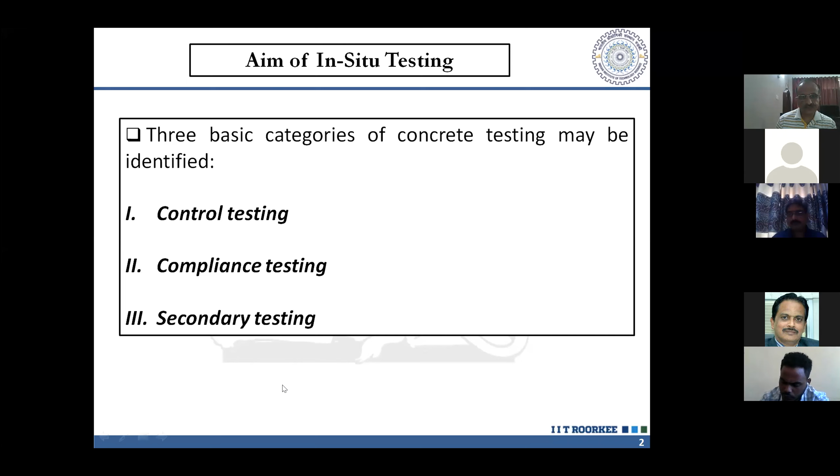If all these tests were planned beforehand, they form part of the second type of testing. If they were not planned beforehand, they are being carried out because something has gone wrong, there is some kind of suspicion, or any other kind of problem. If you are then doing testing on a newly built structure, it will of course be secondary testing, but the type of test will essentially be similar in nature.

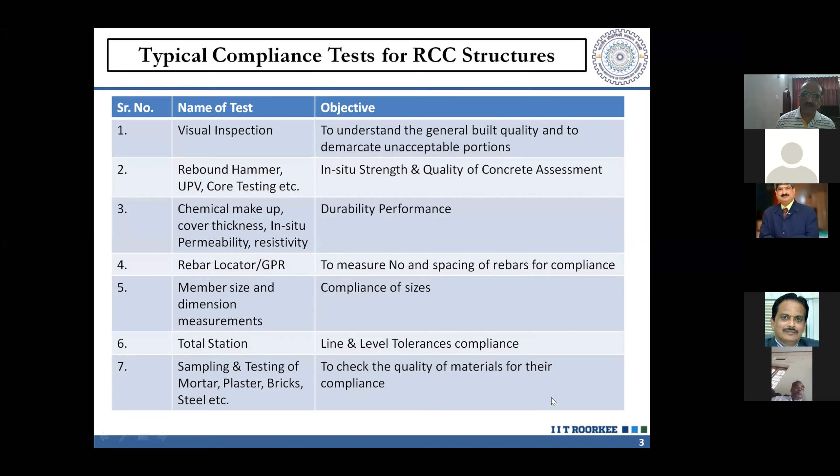If we do all these tests on a newly built structure and see that largely things are in place, then we can say that as far as construction quality - both with respect to material and workmanship - is concerned, that is fine, and everything is as per specification. If something is wrong somewhere, then corrective measures are to be taken.

Now, typical secondary testing program - compliance testing can also be secondary testing if it is not planned beforehand, as I've already explained. Secondary tests generally cover both unplanned tests on a newly built structure, and testing of old structures. Testing of old structures can be done for many needs, many reasons, which are coming in the next slide.

Different typical testing programs which form part of secondary testing are given in this table. As I said, compliance testing can be there. Second is in-situ strength assessment of existing or old structures. Very often we are required to compute the structural adequacy or structural capacity of different members and the structure as a whole.

For that, we have to find out in-situ strength of concrete - very, very important. So in old structures, that is required to be found. This is one type of secondary testing.

Now, durability testing of an existing structure - the aim is to know the cause and extent of deterioration, meaning to find out the cause of the problem if we figure out some kind of deterioration, and also to know the extent of the problem or quantify it, so that appropriate restoration and rehabilitation measures can be designed. The most common example is corrosion. For corrosion, we have to carry out a number of tests to find out the cause and extent of the corrosion, and then design the rehabilitation, repair, or restoration strategy accordingly.

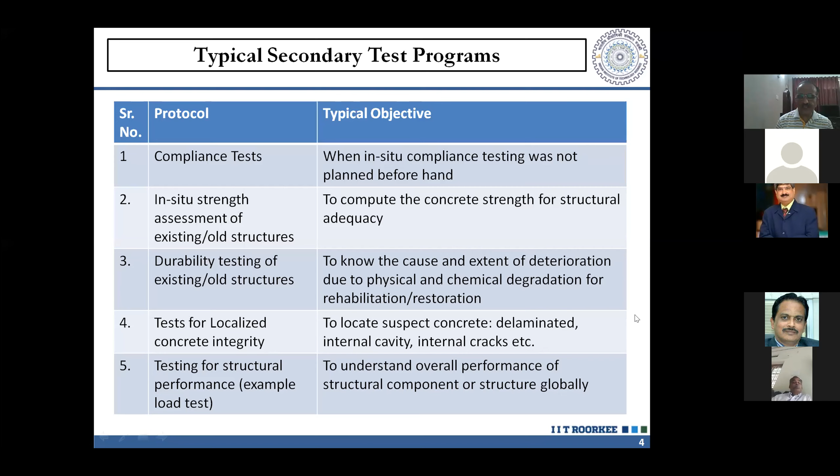So these are all different typical testing programs. There can be many more also which can be part of secondary testing. Now, as I said, there are different needs for doing all these secondary test programs.

Second is acceptability of a structure for purchase or insurance. If somebody wants to purchase a particular building or structure, he or she may say, I want to get it audited, I want to get its structural audit done. So that is also one form of secondary testing, because testing would be required there.

Assessment of structural integrity or safety following material deterioration. If after some years we see some kind of deterioration happening, or damage caused because of overloading or an accident like fire, blast, fatigue, or other such causes, then also we have to carry out assessment. So that is one example, or one type, of the need for secondary testing.

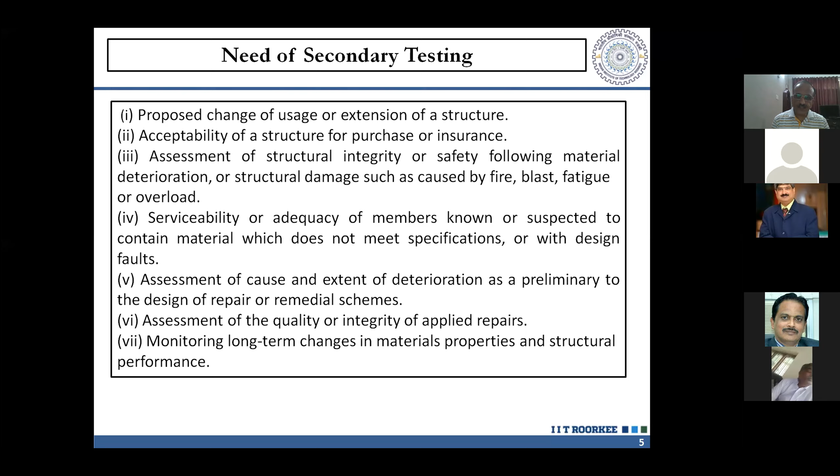Assessment of quality and integrity of applied repair. Yes, of course, we have not reached that extent, especially in India. Only in a few cases have I seen that once the repair or restoration is done, people assume everything is over—actually it is not. Many times repairs are not done properly, and then the quality of the repair itself needs to be checked. So that is also one form of secondary testing.

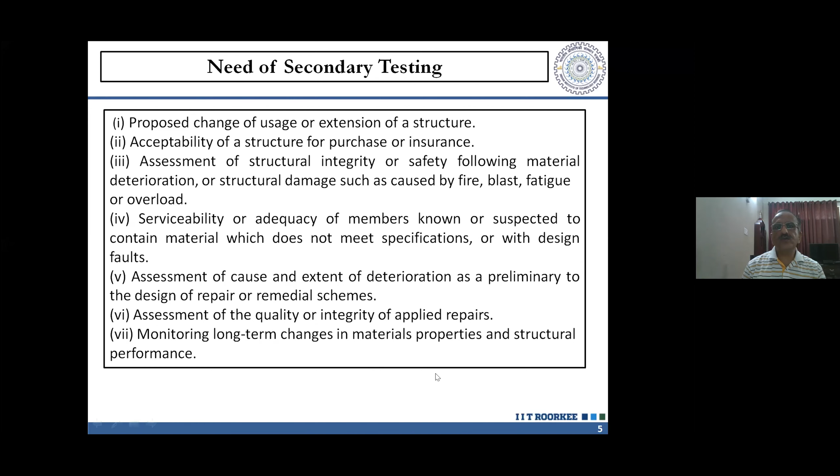Then, of course, monitoring of long-term changes may be required for some time, especially for academic reasons. So these are all the needs. Now, what is the sequence of testing?

Testing program planning—as I said, the aim of testing should be clear right in the beginning. Only then will we be able to plan our tests properly, interpret the results properly, and come out with meaningful conclusions—only if we have established the aims right in the beginning.

So the aim of testing is required, and you can take the cue from the previous slide—whether it is compliance testing or secondary testing, and if it is secondary testing, whether it is because adequacy of an old structure is required for some kind of expansion. That aim has to be clearly defined right in the beginning.

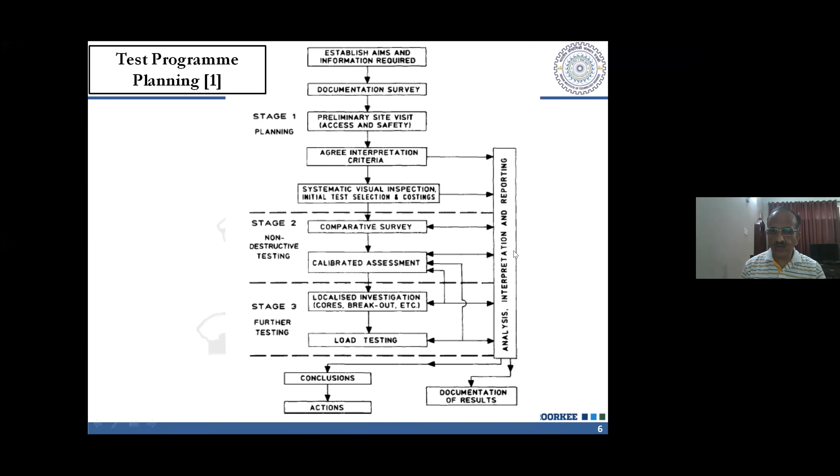So here, further testing essentially meant load testing. Load tests are full-scale tests. There are risks also, very, very difficult, and should be carried out only in unavoidable circumstances. So you just go here and make a conclusion. This is a broad flow chart of the whole testing program.

Now, test selection: if testing for concrete strength is required, it could be part of compliance testing, part of secondary testing, and further within secondary testing, it could be part of different types of testing programs also. If in situ assessment of strength is required, which is generally required in all testing programs, whether compliance or secondary, and further in secondary or compliance, any other type of testing, this is something which is always done.

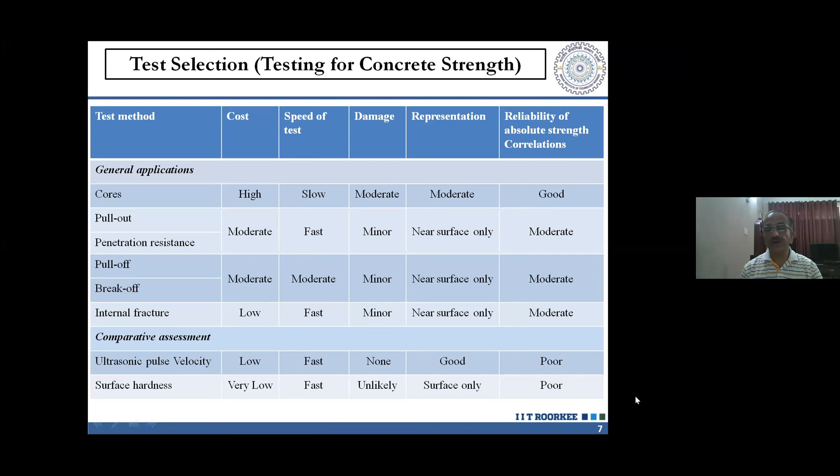UPV and rebound test, surface hardness tests - they are the most common ones. All other things are okay, but the reliability is poor. As I said, you can make them moderately reliable if you take into account and make corrections for all the influencing parameters.

Now, durability tests, which are also required for both types of testing programs. Some of them would be required as part of compliance testing, and remaining ones would be required as part of secondary testing. You can see this is a list - I'll not read it all, but you must be familiar with many of them.

Cover measurements are required in order to check compliance testing - checking compliance with design specifications, whether the proper cover thickness was given, so we can say whether enough durability will remain in future life. But if it's an old structure, cover can be checked to see whether the original cover was sufficient, because that will let you know if a problem has occurred. For example, if carbonation or corrosion has been seen, generally you will see it is at the location where cover was not proper. So cover measurement is required.

Carbonation depth is required in order to find the cause of the corrosion. If it is because of carbonation, chloride content is required to be found - there are different methods. Half cell potential and resistivity are required. These three tests are required to know the cause of the corrosion.

These two tests are required in order to check whether the corrosion is active right at the time of testing, and further in order to demarcate the corroding areas and non-corroding areas, so that you can carry out rate of corrosion tests on the corroding areas in order to find out the rate of corrosion.

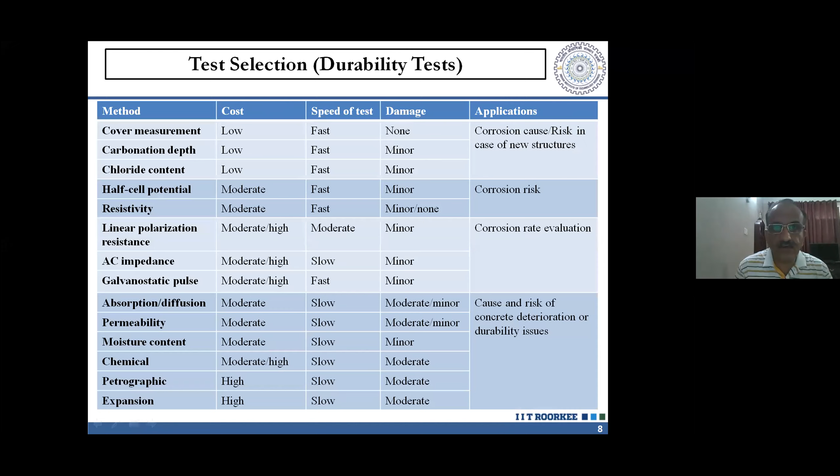Now the most important question which is always in our mind when we go to the site: we have established the aim of testing, and we have largely understood the sequence of tests, to what extent we are going—whether we are restricting ourselves only to visual inspection, or going to the stage of in situ testing, where we perform both comparative and calibrated assessment. Both will be done. So once decided, we go to the site, go to the building, and start the tests.

Tests have been selected. Now, how many tests? How many tests at one location should be carried out so that they represent one reliable observation point? And also, how many observations should be taken on one complete structure? That is the biggest question in our minds.

This table shows the number of tests only for the strength assessment test, but there are similar guidelines available in books and codes, some mentioned in this presentation. Their guidance is given even for other types of tests, like durability tests also. But since strength assessment is always the most common type of testing program, I have put the number of tests to be carried out at one location, which will form one observation.

For example, if you want to take one core observation at one location, then 3 standard cores should be taken—standard meaning 100 by 200 size cores. Small cores means when you are not using standard size, less than 4 inches, 3 inches, or 2 inches, because guidelines allow that if the aggregate size is something, the core diameter has to be more than 3 times the aggregate size. So for 20 mm aggregate, a 3-inch core would be okay, but that is not a standard core—that is a small core.

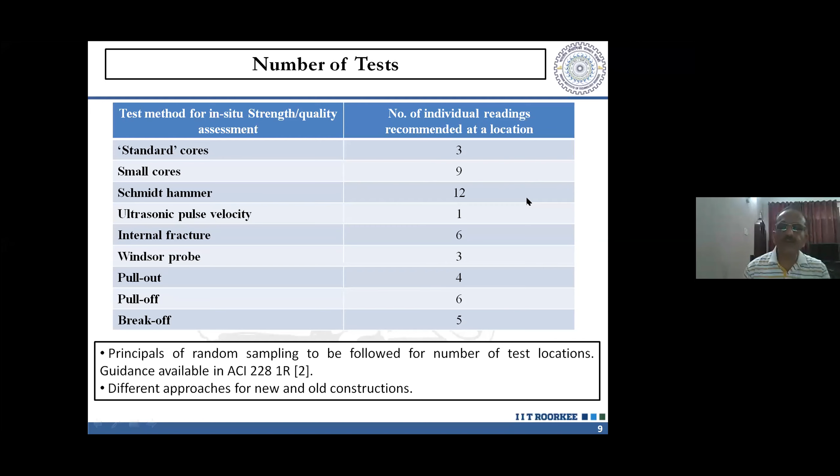There is some more guidance given in these slides, which will help you decide exactly where you should take the reading in a beam, column, slab, or wall after deciding the number of locations. When you do concreting of different kinds of elements, some are shown here. There is variability coming from supply of the concrete, variability from curing, variability from compaction and placement - so many sources. Variability of supply is something which does not follow any pattern.

Variability of compaction and curing in different elements largely follows a certain pattern that can be found out to some extent, but supply variability is always random and difficult to figure out precisely. Because of all these issues, concrete strength will always vary along the height.

This is the variation along the height shown here. If you try to show it with respect to the strength at the bottom of the member, you will see that in the beam and the wall, the variation is largely uniform from bottom to top. Top could be even 50 to 60, 70 percent, or sometimes very less, almost half of what you see at the bottom.

For columns and slabs, generally slabs are 6, 7, 8 inches thick. If slabs are very thick, which is rare, you have to treat them like a beam. In columns and slabs, it is generally seen that the variation happens only in the top 20 to 25 percent thickness. Otherwise, largely it is okay. So this is the natural variation which would be there.

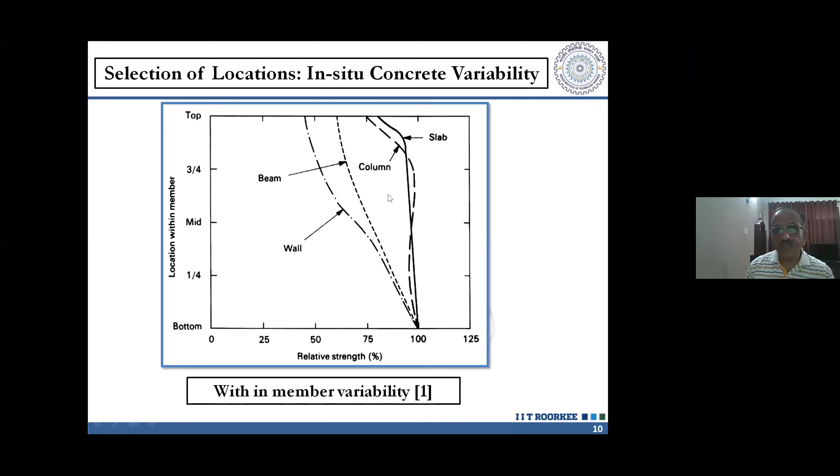If it is compliance testing, you take the reading somewhere towards the bottom. If it is secondary testing, you can go somewhere towards the top. So this is about that.

In a slab, and in a beam the corner is not quite the same, but generally if you talk about the plan variation, it is seen that towards the corners the strength of the concrete is always lesser compared to the middle portion, because of the variations of supply, compaction, curing, and placement.

Another challenge, another source of uncertainty, which is important when deciding acceptance criteria for in-place strength values or in-place value of any other property, is the difference between the strength of a standard specimen and the strength of the concrete in situ. There are differences because of the issues just mentioned, and also because a standard specimen is cast, cured, and handled quite differently from the actual structure. Because of that, the typical 28-day in-situ equivalent wet cube strength as a percentage of standard cube strength could be, in the column, in the range of 55 to 75 percent.

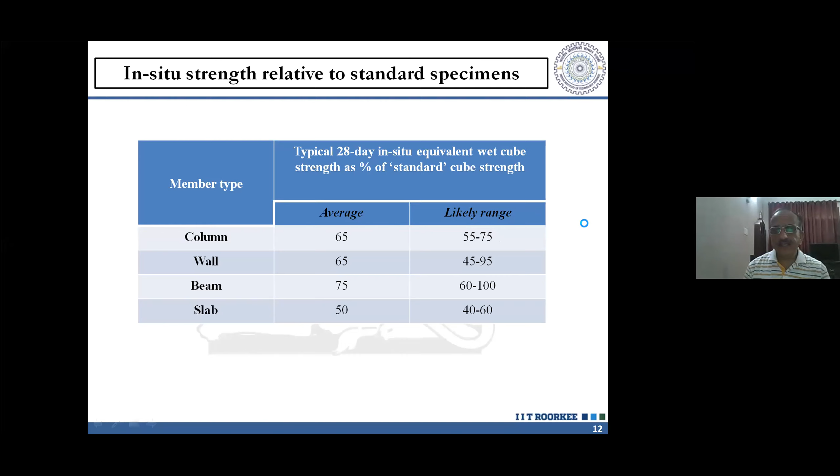So where you are taking the reading, you should keep in mind this variation, and also the aim of testing. Then only the judgment has to be made.

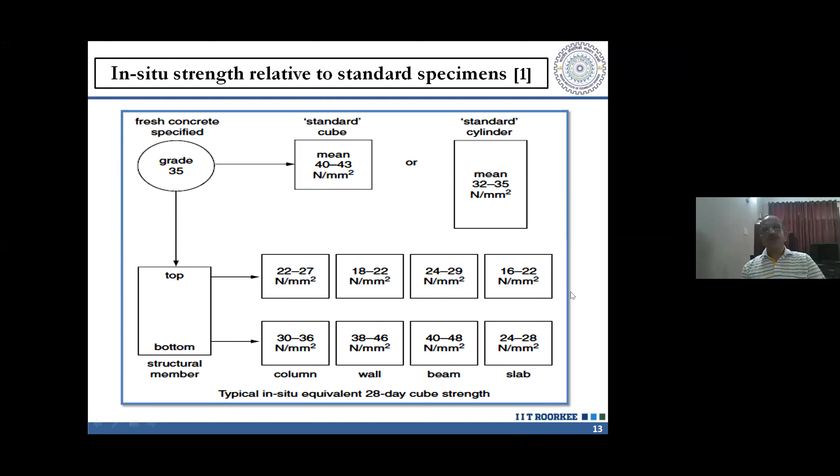Now, after talking about the number of tests and the location of the tests briefly, let us come to the interpretation of the results.

Once you have already done the tests in a given structure - a chosen type of test has been performed, and then readings are in front of us.

Now interpretation is the next job, so that we can decide acceptability if it is a compliance scenario, or we have to find out structural capacity if it is the case of secondary testing, where you are talking about coming out with the adequacy of an existing structure.

Under interpretation, there are two ways of making interpretations. One is variability of the results is very important - variability of the results is required to be found. This is very, very important for compliance testing, for a newly constructed structure.

It could be a form of compliance, or it could be a form of secondary testing on a new structure where the aim is compliance only. It means for compliance testing, their variability is very, very important.

The variability could be in terms of strength, it could be in terms of any other property, but I am presenting in terms of strength.

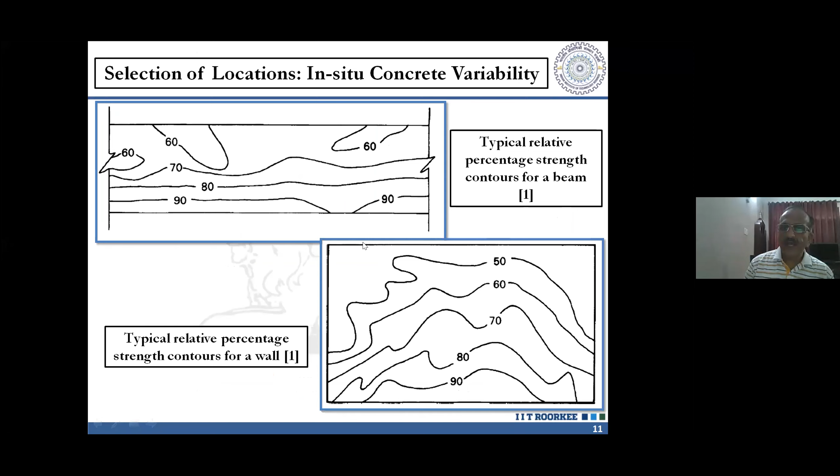Some typical variations are shown over here in the form of a histogram, or if you go back, you can even show that in the form of contours also - like here, you can show the variations in the form of contours for any kind of in-situ property. As I said, here I am showing strength.

It could be, for example, if you are doing corrosion tests, half cell resistivity tests are being performed, you can plot their contours.

So color coded contours will let you know what are the corroding areas, what are the non-corroding areas. Similarly, for strength, for rebound hammer or UPV tests also, you can plot the contours or you can plot the histograms - so histograms are shown in this particular slide.

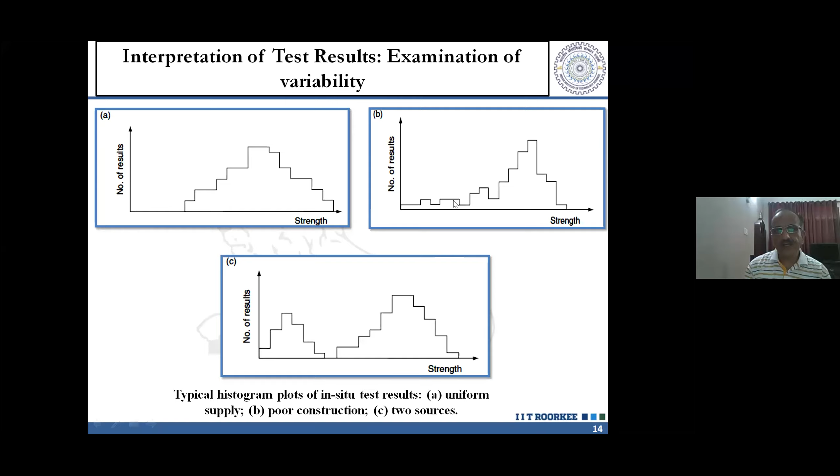On the newly built structure, in terms of strength or any other in-situ property, you can draw the similar kind of thing in terms of rebound number also, in terms of UPV, in terms of pull-out resistance, any property - so you can compare the values.

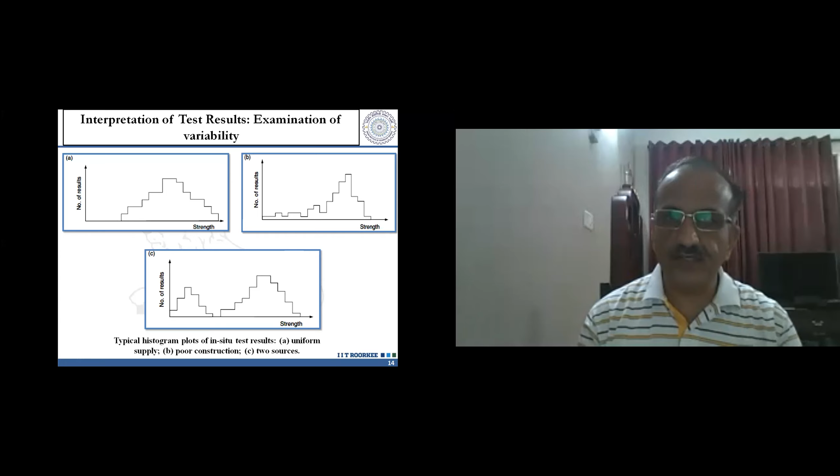So this comparison - with respect to this kind of assessment, the application of in-place methods or in-situ methods is huge. The methods are very good, reliability and accuracy is very huge, good. So this is one way of making your interpretation.

But another way of assessing the variability is that you can numerically find the values of some statistical parameters - like for different types of strength tests, you can find out the coefficient of variation from the results which you have taken.

And then you can compare them with normally acceptable ranges, normally acceptable values given in this particular type. This is just general guidance.

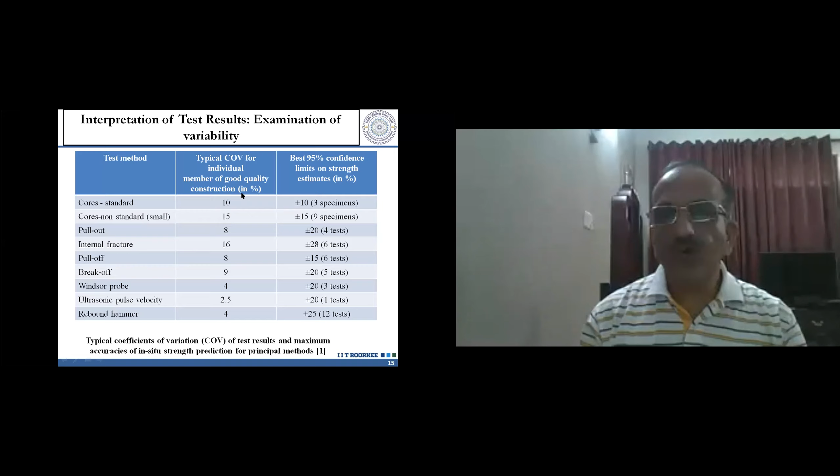For 95% confidence levels, the percentage accuracy for different tests is shown, along with typical coefficient of variation. So if you compute values from the in-situ tests you perform, you can compare the variation found in terms of coefficient of variation to see whether they fall within this particular range. These values are for a single unit cast from a number of batches. But for a structure as a whole, with many units and different batch numbers, you can slightly increase the coefficient of variation, and a proper informed decision can be taken about the acceptance criteria for COV. This is just general guidance if you want to find the actual value of variation in terms of COV and make a decision accordingly.

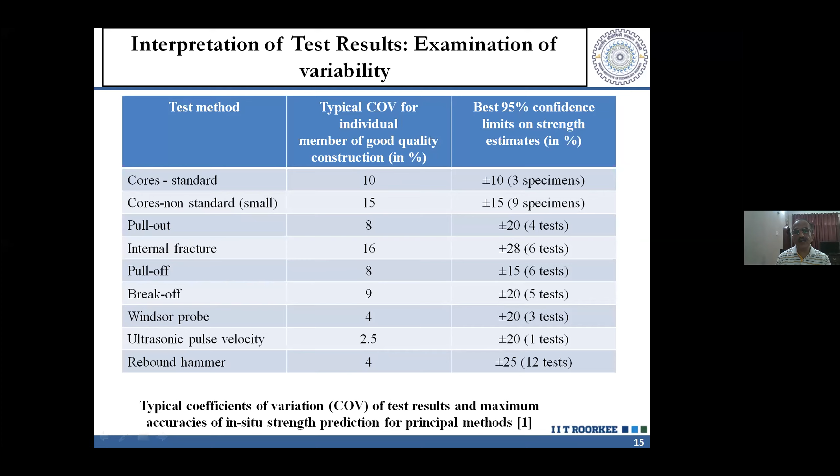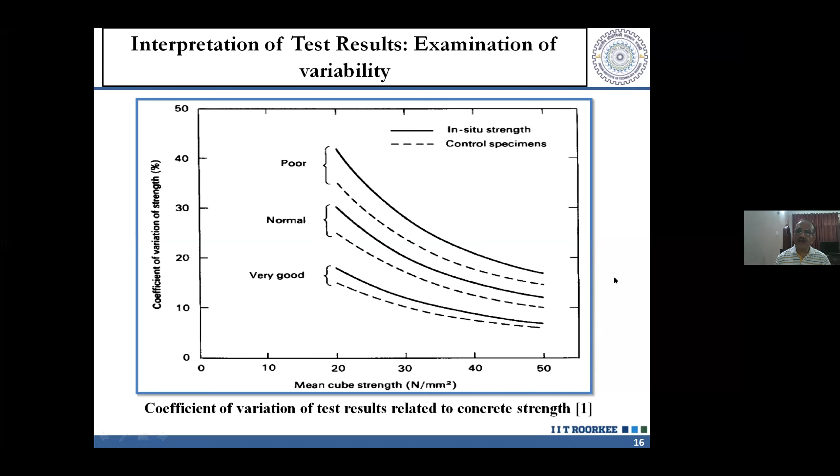This coefficient of variation is not independent of concrete strength. Generally, it is seen to be dependent upon concrete strength — COV goes down as the concrete strength increases, or when using special concretes such as high strength concrete, lightweight concrete, or self-compacting concrete, it is expected to move in that direction. So for both control specimens and in-situ strength assessment, curves are given, and for different types of quality control you can find out how much the coefficient of variation should be. This can also serve as guidance to make a decision about variability and about the acceptance of concrete based on this.

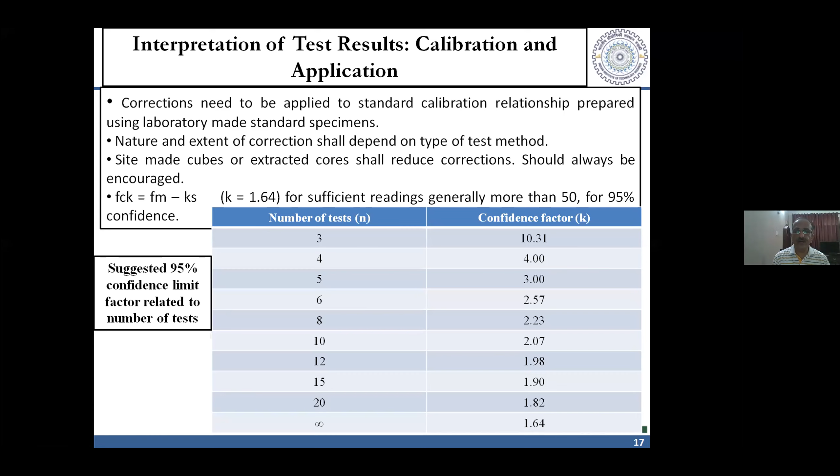But most often, we are required to enter into calibrated assessment, especially with respect to strength of concrete, when we carry out tests and do interpretation. If concrete strength knowledge is required for compliance, or as part of secondary testing, then you have to use a calibration chart. Now, the calibration chart is very, very important — you should have a proper calibration chart made, and standard charts should be avoided.

Standard charts given by the manufacturer should be avoided, because they've been prepared using concrete which is not representative of the concrete under investigation. If you choose to use that standard chart, you will have to apply many correction factors, the number depending on which type of test you are doing. Especially for UPV and rebound hammer, there are a huge number of corrections required to get a judicious or reliable value of concrete strength at the point where the rebound observation was taken. So standard charts should be avoided — you should prepare a site-specific chart.

Now, for a new structure, with respect to compliance testing, as part of that testing you should prepare a chart using concrete from the field, the same material being used for different elements at different ages. So you can cast cubes using the material used at different stages of construction, and keep using those cubes — bring them to the laboratory, take the rebound number, UPV, or whatever NDT test you've chosen, later on in compliance testing of the concrete. So you develop the chart using that particular cube prepared from site concrete for a new structure.

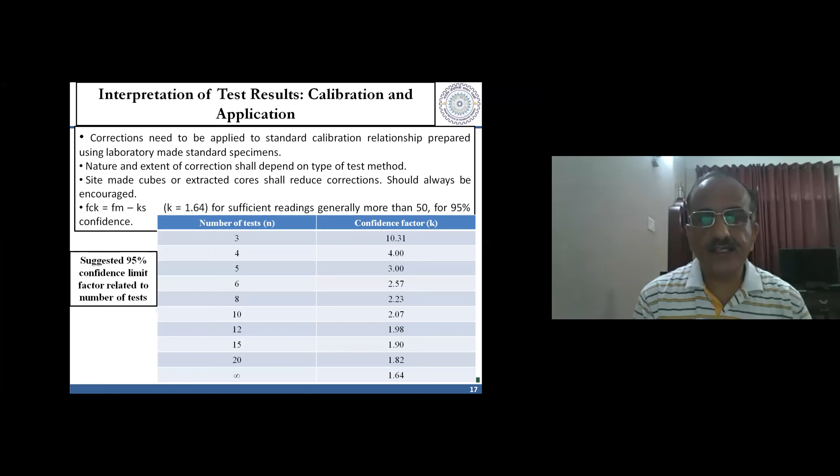Use 95% confidence level, and if you have chosen to use this standard equation, which was used for this 5 percentile or FCK characteristic strength by using lower 5 percentile case, which you generally use for standard specimens, then okay, we can use it. This is corresponding to normal distribution, where the quality control is good. But if it is not, quality of the concrete is bad, then the distribution could be log normal also. In that case you have to use the log values of the strengths shown over here.

Anything we have chosen to use, depending upon the quality of the concrete, FCK will be found by using this. FM is the average, or mean in-place cube strength, in-place equivalent cube strength, which you will compute from the in-place cube strength values. Minus K is the value which we generally take as 1.64 for 95% confidence level when sufficient number of readings, more than 50, are taken. So we can take 1.64.

But let me tell you that nowadays there are many codes, especially ACI 228, that allow that when you do these kinds of assessment, we might not be talking about 95% confidence level. ACI 228 even says we can allow confidence level as low as 75% in ordinary structures, in important structure it says 90%. Only in very, very important structures does it say we have to choose a confidence level of 95%.

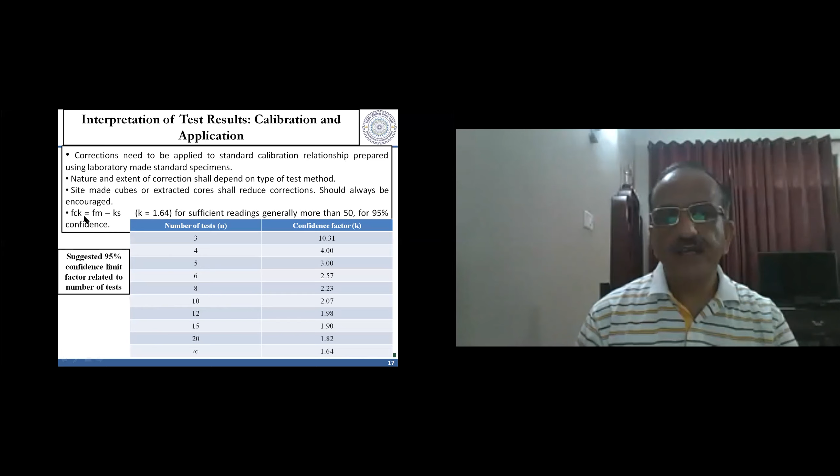Now, of course, you have to apply your judgment whether it is acceptable or not. Towards that end, as I mentioned a couple of minutes back, generally if this is more than 75% of the specified value, you should assume it to be all right - that is, not failing.

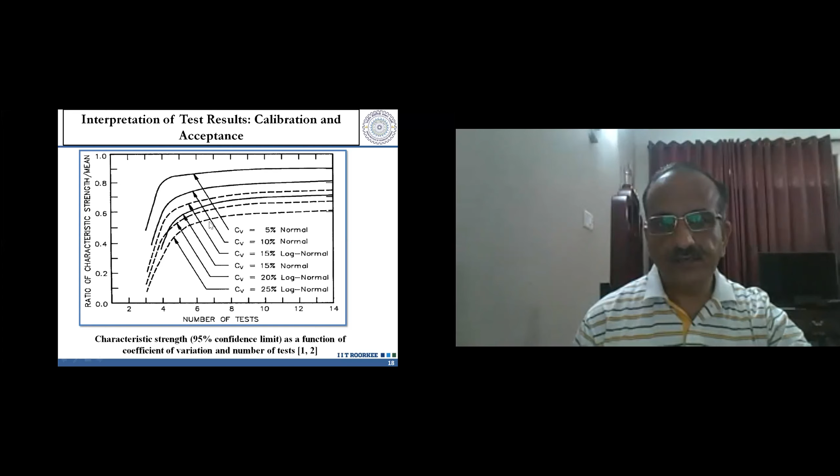Now, as I said, calibration is very, very important. Largely the contents of today's discussion I have completed, but I'll continue by taking some examples to show you some of the things I've spoken about or highlighted today.

I said that developing a proper calibration between an NDT test observation and concrete strength is very important. If you have chosen to carry out calibrated assessment - for example, if we have to find out concrete strength and FCK value - and if you are using rebound hammer, as I've said 2-3 times now, it is very difficult to find out the concrete strength from it.

But people say it is very easy. What they do is just go to the site, take the rebound number, and by reading the standard chart, they'll tell you this is the strength. Then if it's more than the grade FCK, they'll say this entire thing is correct. Based on today's discussion, you must understand now that this is not correct. If that were all it took, any schoolboy could do it - why would engineers be required?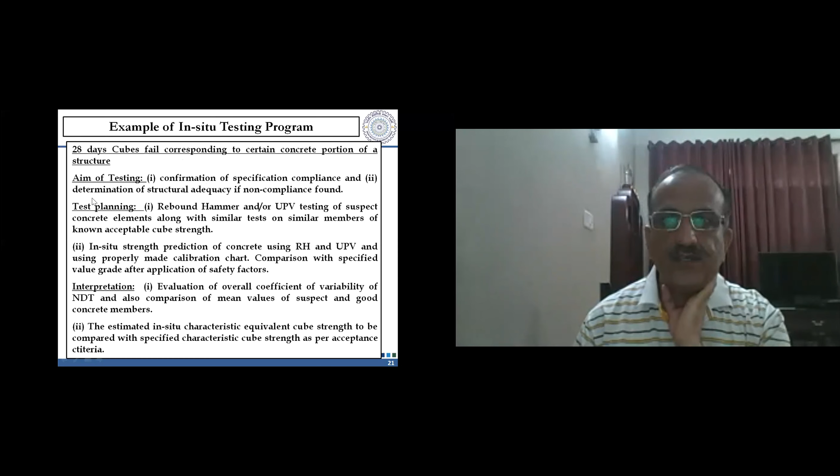If after doing NDT you find it is not complying, you will not straightaway say demolish it. Using the reduced grade or lower strength you find, you carry out structural analysis. If that comes out okay, you can go ahead with that concrete. The problem is limited only to that extent in certain portions.

If after finding structural adequacy you see things are still bad, then you have to take a decision about repair, restoration, or demolition, depending upon the case. This is about the aim.

Now, test planning: what tests can you plan? Rebound hammer or UPV, or both? Generally both are done together. Combined testing is always preferred because it gives higher confidence level and more accurate values. The reason is that certain influences affect different methods differently.

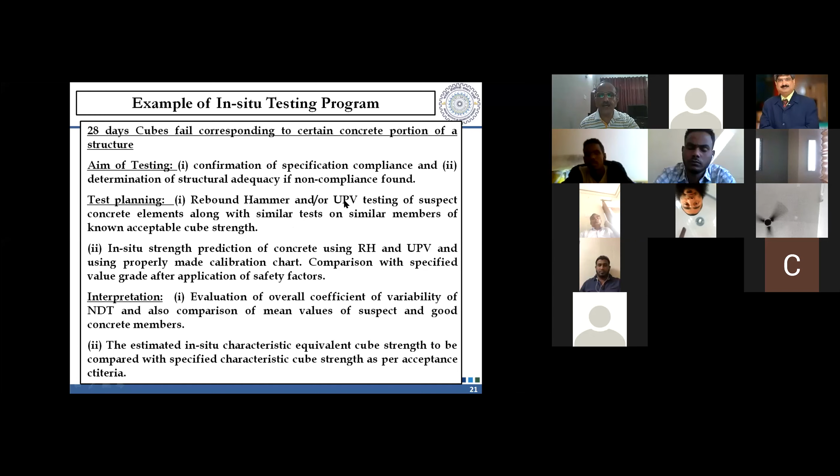When you perform these methods in a combined way, like two or three methods, the influencing parameters tend to cancel each other. For example, with moisture content, the rebound hammer gives a lower value while UPV gives a higher value. If you perform both tests together and base your assessment on both, the influence cancels out, so you get a better result. That's why rebound hammer and UPV are both performed here.

Then testing of suspect concrete elements: you perform this test on the suspect concrete, and also on the concrete whose cubes were found to be all right, meaning good concrete. So you perform the test on both concretes.

This is about in-situ strength prediction of concrete, first considering variability. Second, you find out, based on rebound hammer and UPV using site-made charts, and after applying correction factors, you determine the grade or FCK value as well.

That will also be found in order to check the compliance. Now the interpretation will be found using this. You have rebound hammer, UPV values for good concrete, for suspect concrete portion, and for the acceptable portion, for both.

You will draw the histogram for the combined values. If you get one peak, it means everything is fine, things are fine as far as variability is concerned. You're getting one peak, and if coefficient of variation is also coming out to be all right, within the range,

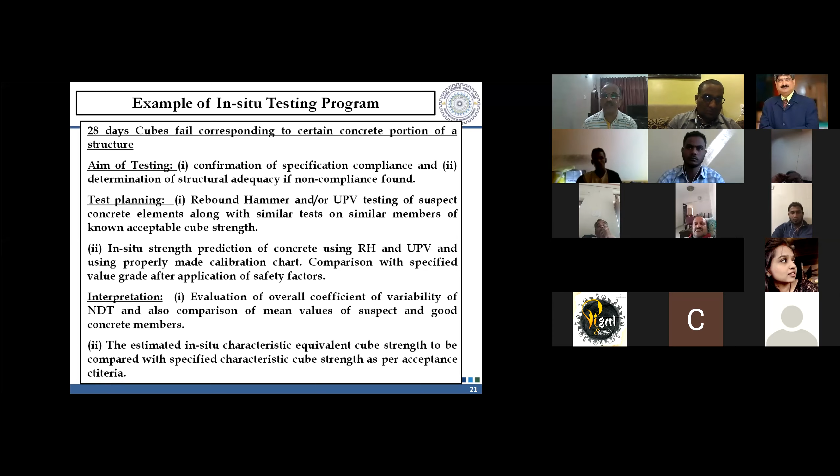Further testing means you can recommend cores be extracted from the suspect area. Then if cores are also saying it is not good, the next step, as I said, structural adequacy will be found. And if structural adequacy is also coming out to be insufficient, then retrofitting is the only solution, and sometimes demolition is also required. So thank you very much.